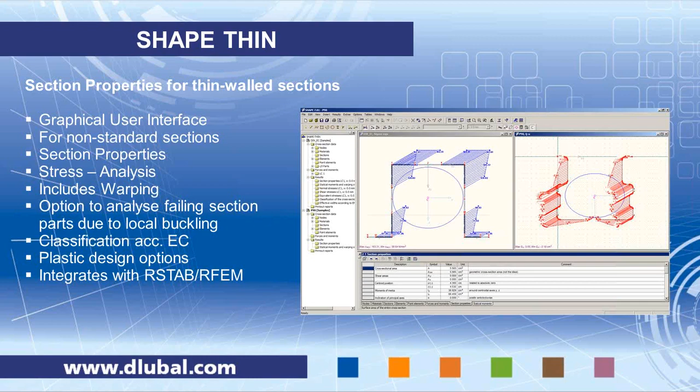SHAPE-THIN also allows you to enter internal forces and get stress analysis. It includes warping, and it's also capable of checking for local buckling and analyzing the failing section parts on a cross-section. It comes with classification according to Eurocode for general cross-sections, and it has plastic design options. It's also capable of importing internal forces from RSTAB or RFEM, or you can manually enter internal forces as you like. We will see this module live, presented by Chelsea in a few minutes.

The second module we are going to take a look at is RF-FE-LTB. It is meant to do buckling and lateral torsional buckling analysis according to second order theory. It's made from a 7-degree-of-freedom 1D finite element, which includes warping moments. In general, you find in the codes procedures for checking stability for standard sections, like an I-section, but once it comes to a general section, there are not many regulations you can use. In general, you have to use a program like RF-FE-LTB, where you can also set loads eccentric, including the 7th degree of freedom, the warping degree of freedom, and with an imperfection and a second order theory analysis and a stress analysis at the end, you can check for the allowable or limiting stress, and whether the critical load factor is smaller or larger than 1.

As I said, it works for all kinds of sections. It allows you to place loads eccentrically. It also has the option to stabilize sections eccentrically, so you can arrange a support or a spring along the top flange, for example. And it does stability and stress analysis. We will also take a look at this module live.

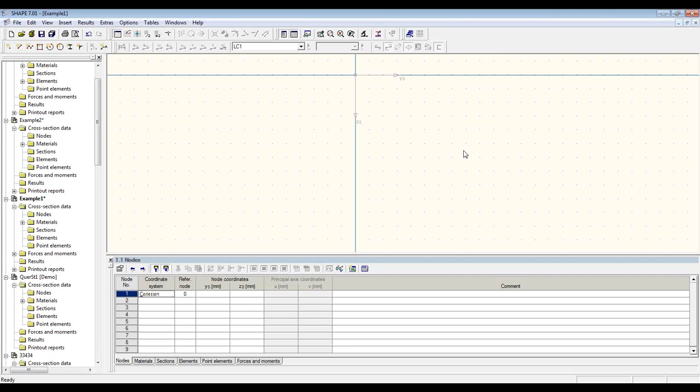Hello everyone, thank you once again for joining us today for this webinar. My contribution for today will be an introduction into SHAPE-THIN by going through a couple of examples of modeling and analyzing non-standard sections. If you can see my screen now, I'm in SHAPE-THIN, and the layout of the program is similar to RFEM in that you have a graphical window and workspace. Below that are tables. To the left here we have a navigator, and at the top there is a toolbar with several tools for modeling and also for displaying results. So in SHAPE-THIN, when you are creating a new file, you have some options in this dialog box. First, you define the name of the section, which is also the file name, and you can also add a description, which will appear in the heading of the printout report.

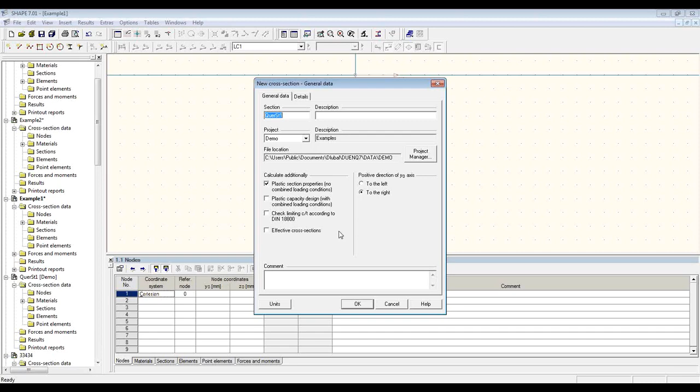Below here, you can see some options for calculation. Here you can define if you would like plastic section properties to be determined. You can also perform plastic design. You can check limiting ratios according to DIN, and also check or analyze the effective cross-sections. To the right here is just an option where you can define the direction of the global coordinate axis.

Okay, one last thing before I start with my example, I'd like to take a quick look at the project manager. This comes with SHAPE-THIN and is a nice way for you to be able to quickly access and organize all of your files in previous sections that you've created. Here is a preview of my first example I will be creating, and here's a preview of the second one, so you can keep that in mind.

Okay, so getting started here, my first example will be demonstrating one of the ways in which you can create sections in this program, and I'll be making a built-up column section out of standard I sections and then modifying them. I will be creating an opening and modeling some welds. So first I'll go ahead from the toolbar, open up the cross-section library, and here I can choose my I section for my first part of this.

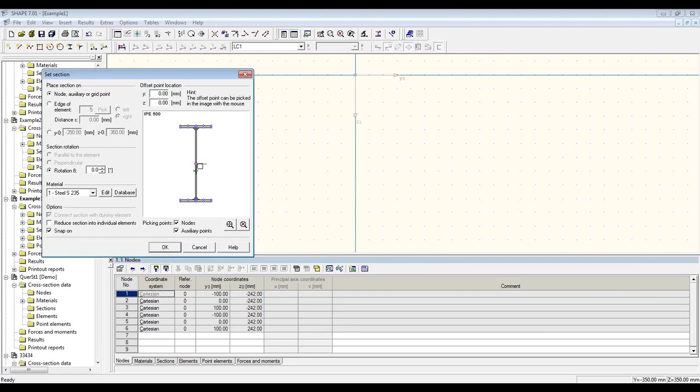So I'm going to take an IPE 500. And this dialog box that appears is what facilitates you placing the section. So since this is my first one, I can just go ahead and place it so that the top flange is at the center ordinate.

Okay, going back into my cross-section library, I can choose an HEA 220. And here I'll use this section, or this dialog box, a little bit more. I want to define a rotation, as if you saw from the preview. I'll have a rotated I section attached to the web. And here is where I define which part of the section I'm deciding my placement by. So at the moment I have the center one selected, so if I go to the window and pick this node here, the center will be placed there.

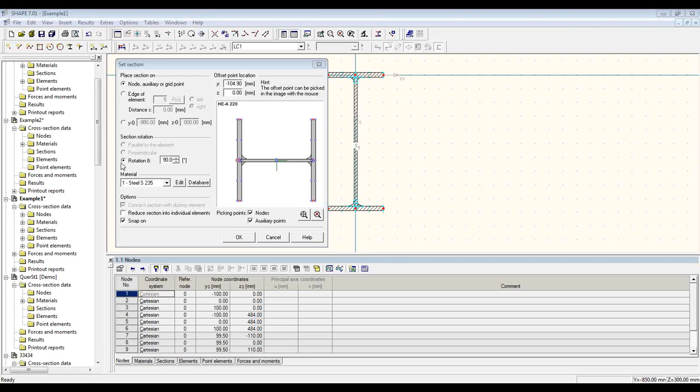So first I want to go in and choose the one on the left side, and then, one moment. Okay. I can go ahead and choose where it's going to be placed on the section that has already been placed. So here I pick the element that I want on the edge on the right side, and there you can see it's locked on the right side of the web here. And I can just place it anywhere, or I can select my distance from here. Okay, and hit OK, and there I have it placed.

So now I have two standard sections that can be selected independently. If I would like to show the section details, I can go ahead and display them from this dialog box if you need to reference that at any point.

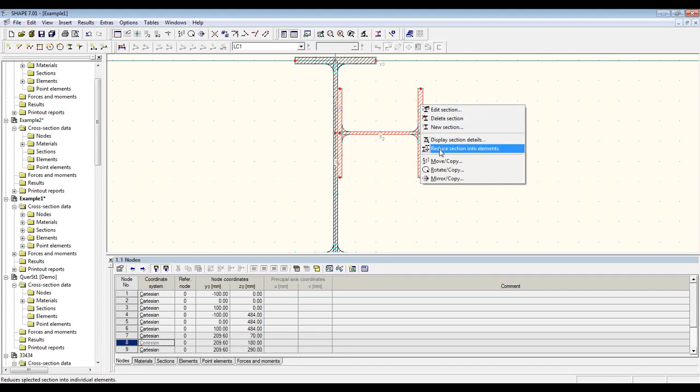Okay, so as I said, I'd like to make some modifications, add an opening. In order to do that, I need to be able to select these parts individually. So if I make the selection of the entire element, right-click, and select Reduce Section into Elements. So now I'll show you exactly, letting me know I have 5 elements and 4 point elements. So here I'll go in, zoom in. You can see that each side of the flanges and the web each make their own element now independently, and the curved parts are point elements as well.

So now I can select the web, right-click, and choose to insert an opening. So here, define my width of the opening. I want 30 millimeters, and its location. I want it to be 60 millimeters from the start of the element, which in this case is the right side. So apply, and I have an opening placed.

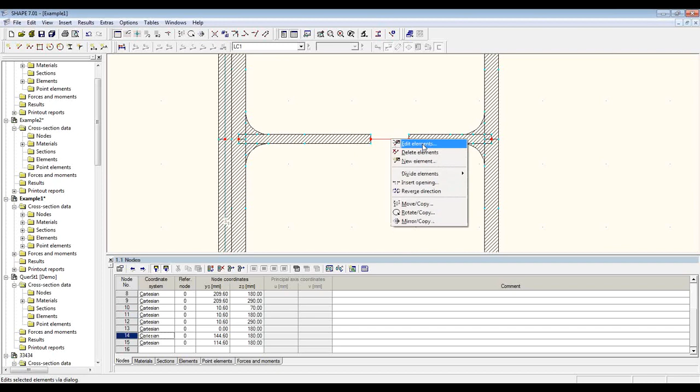When an opening is defined, what is put in between is a rigid dummy element. And for our calculation, we have a value called the effective thickness, which is for the shear transfer. The recommended assumed thickness is the average of the thicknesses of the neighboring elements. So in this case, the web here is 7 millimeters, so I'll make the effective thickness 7 millimeters.

Okay, so next I want to model a couple welds at this connection point at the top and bottom. So for that, I'll go back up to the toolbar and select a new point element. And this is ready to go. I have my radius at 10 millimeters, and then I can just select which node I want to place it at, and there I have my weld.

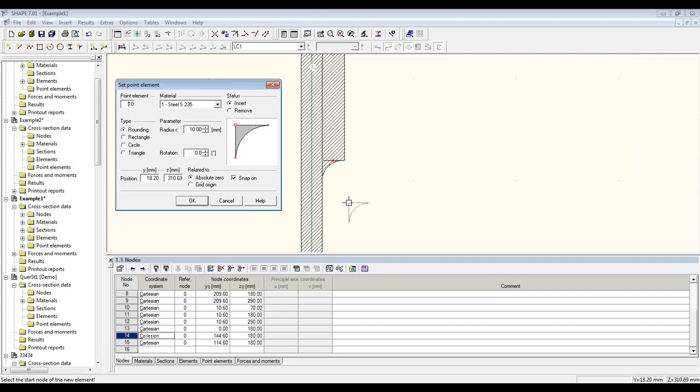If I go up to the top, I can make a rotation, negative 90 degrees, and place the top weld there. Now the area of this weld element will be included in the total cross-sectional area.

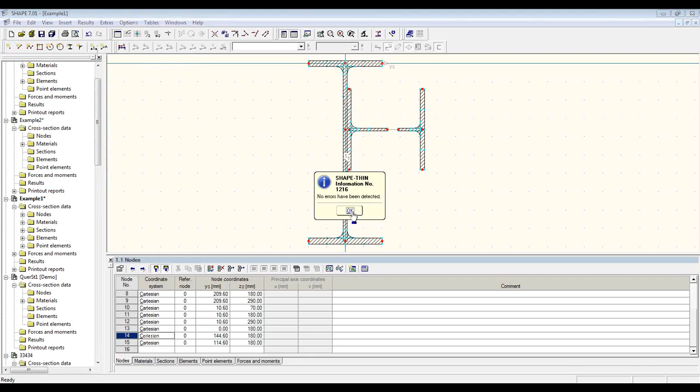At this point I have all of my section modeled. Before I do my calculation, I can do a quick plausibility check. This check will find if there are any errors, and if there are, it will tell you exactly what the problem is so you know what to fix. Plausibility check: no errors were detected. Now we're ready to go ahead and run our calculation and get our results.

The first table you see here is the section properties, with a list of all the significant section properties that have been determined. You have your shear areas, cross-sectional area, position of the centroid, and so on. You can define what is included in this list by using a filter, and you can include even more properties as well.

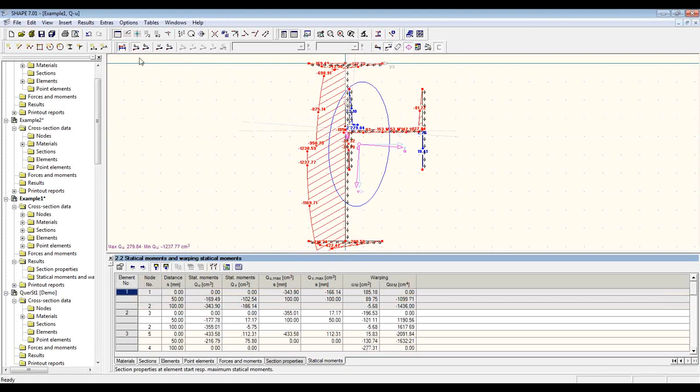The next table available is the statical moments. These are numerical results, and they're also included in your graphical layout. I'll turn this back on so you can see the statical moments in both directions, the normalized warping ordinates, and also the statical warping moment.

One thing I'd also like to point out, before you get to your results, is a table for internal forces and moments, in case you want to perform a stress analysis. These values can be imported directly from RSTAB or RFEM, or they can be entered manually.

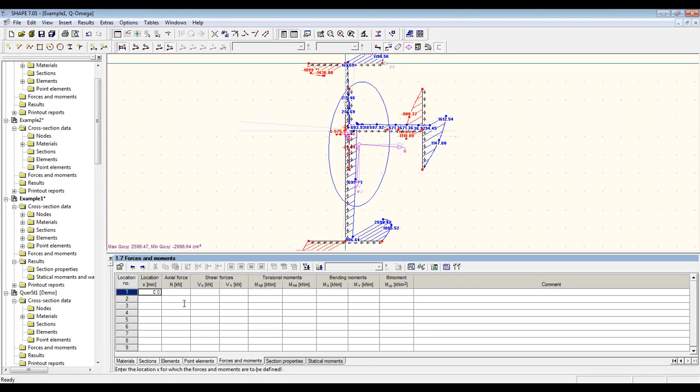I'll go ahead and add a couple of load cases so you can see. At the 0x location, you can do it at multiple x locations. I'll add a compression force of 80 kilonewtons, and bending moments in both directions for the first load case. Then for my second load case, I'll add a smaller axial force and bending, in the opposite direction for my last bending moment.

Now when I run my calculation, a few more tables appear at the bottom, showing the values both in tabular form and graphical distributions. So I have my normal stresses, my shear stresses—there are none here since I didn't have any shear forces—and also your equivalent stresses.

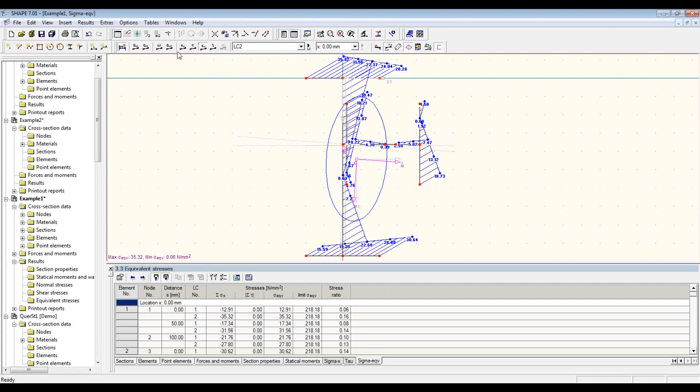Going back to my graphic here, I can include these images of the results in my printout report if I'd like. I'll go ahead and send a picture of the equivalent stresses to the printout report, and set it at 50% of the page. Then I'll also send the normal stresses, also at 50% of the page, and open it with OK.

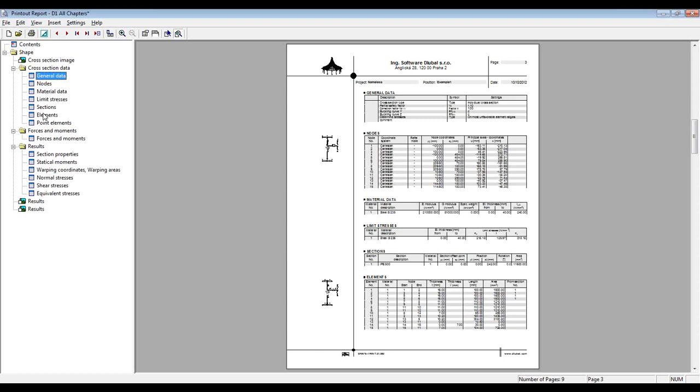Here we have our printout report, with the default setting. It has an image first, then tables of your input data and your results in the same order as they appear in the program. Below, you can see the images that were included. You can customize exactly what information you want to include in this dialog box, and reduce the amount of information that's included.

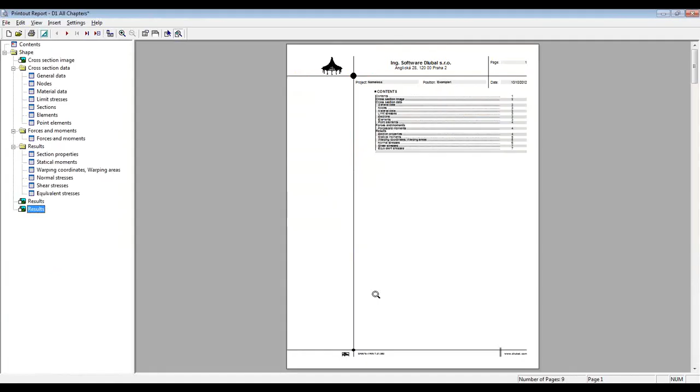Another nice feature of SHAPE-THIN is that for a quick summary of the section, your input data, and your section properties, there's an option to create a so-called short form printout. This is usually one page and sent directly to the printer, but just to let you see what it is, I'll append it to my document. This is the page here—a one-page sheet with an image of whatever you have displayed when you send the print, and a table with your input data and the section properties that have been calculated. That's nice to have.

That's all for my first example. I'll go ahead and get started on my second example. If you remember from the quick preview I showed at the beginning, it's a symmetric section that will be used in a rain gutter system.

For this one, I will just draw it in manually using the element tools in the toolbar. To get started, you define your grid, or your reference point in the grid. I'm working with a 2 centimeter grid spacing. Also define your thickness and material, and then you can just draw it into the grid.

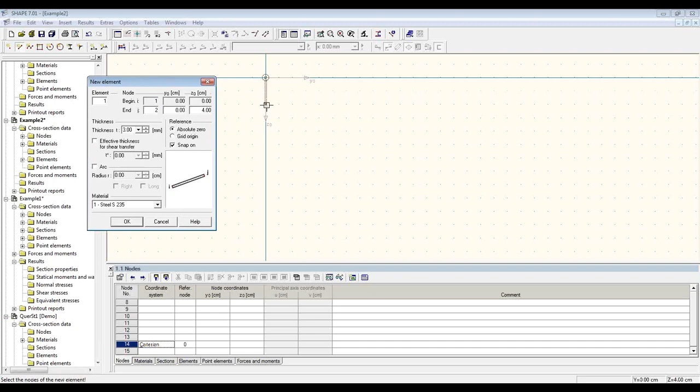My second line I want to be 5 centimeters, but because it's in between my grid spacing, it's easier for me just to type in 5 centimeters as the end node. I want to continue on from this node, but again it's between the grid spacing, so what helps is if I adjust my grid origin to be at this node. Now I can continue on directly from here.

I want the height to be 16 centimeters, and then the width of the trough I want to be 30. Because I have my reference, you can see in the dialog box my reference is at absolute 0. If I change it to the grid origin, so now this is the 0 line for Y, I can go ahead and place it at 30.

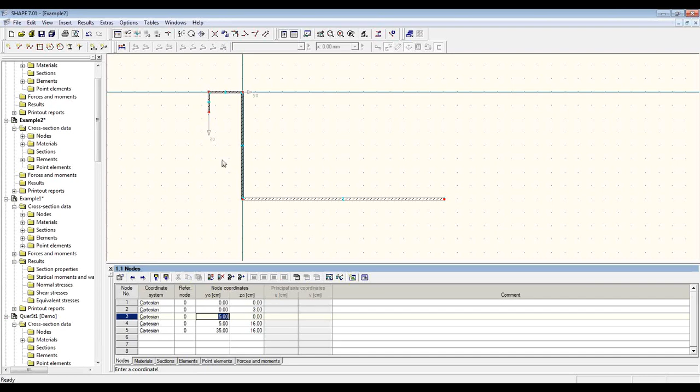Since it's symmetric, I can just do manually half and then make a copy of the rest over. First, I'd like to shorten this line from 4 centimeters to 3. A quick way to do that is to go into the table, find that line, and adjust the coordinate that way. Now it's shortened, and I'm ready to select and make a copy.

Going to the toolbar, I have the mirror option. Create a copy through the Z axis, and select the center of this trough line that I have here. Just like that, I have my full section.

I can go ahead and run the calculation. First, I'll just do a plausibility check to make sure I have all of my elements connecting. Everything is okay, and I can get my results.

Again, you see right away the table with the section properties, and your statical moments and warping constants there.

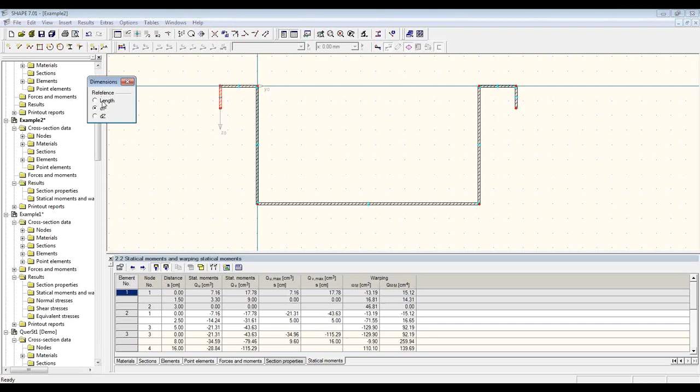Another thing that is nice to include in your documentation is dimensions, an image of the dimensioned section, and I'll show you how you can do that quickly. I can turn off the view of my results and use the dimensioning tool here. Very quickly I can just select to show the heights of these lines and also do the horizontal lines. This is also a nice way to quickly make sure you've made all your lines the right length.

Here you can see, if you check the table, I believe I made... everything is okay, so I think I just made a bad selection with my— I can't select this, but here we go. I just made a bad selection for the dimensions, so let me just try that again.

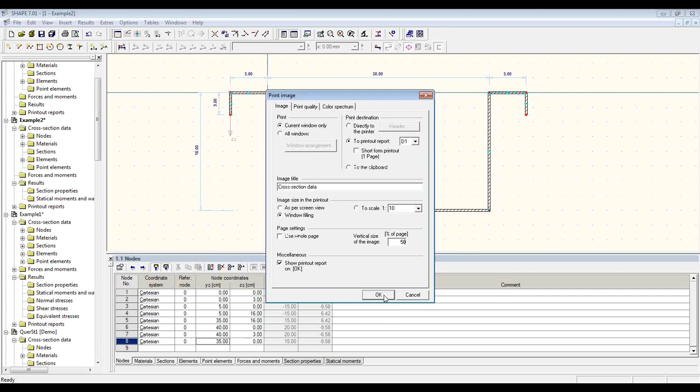Yes, everything is okay. As I said, this can be included in your documentation, so I can just send this once again to the report. 50% is a good size for this type of image. And then there I have a dimensioned drawing of my section to include in the documentation.

So this is all that I had to show you regarding a couple different ways in which you can model in SHAPE-THIN. It's also possible to import a DXF file to use as a template, so this is what Walter will cover, so I will save that for him. Walter will also take you through a few more hints with working in SHAPE-THIN and continue with the section on into RFEM and also present the module FE-LTB. So thank you very much for your attention, and I'll go ahead and let Walter continue from here.

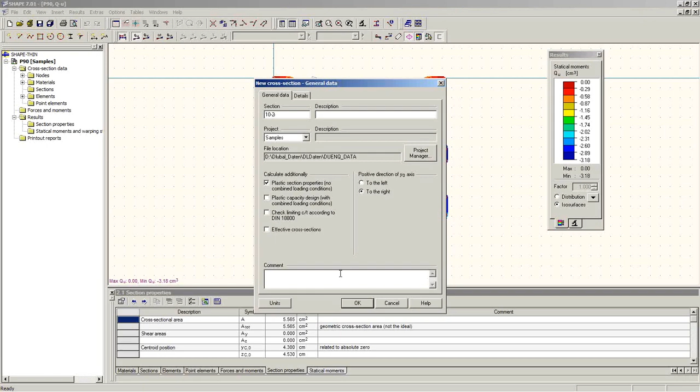What I'm going to do next is import a DXF template into a new SHAPE-THIN model. Therefore, I open a new cross-section, I name it with a number in this case, and I stick with the default template. I have here an empty file. As you can see, you can open several files at the same time. I use now the bottom tree here, and material is already selected as steel S235.

If I want to import a template, I use the File menu, Load DXF Template. The DXF template can be from any DXF file. You find those files typically from the makers of such sections on the internet. You can download CAD templates, and I used one of those from a cold-formed purlin maker and saved it as a DXF file.

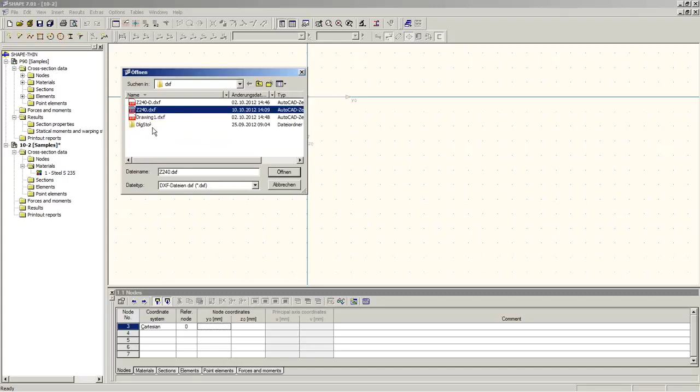Once I import it, I get a small preview dialog. I can first of all show and hide the different layers.

In those DXF files, typically there are all kinds of lines, texts and explanations, and you have the option to select a certain layer where the information you like is located. I can also automatically assign to this layer or those elements a thickness that I enter in the text box, for example 3 millimeters.

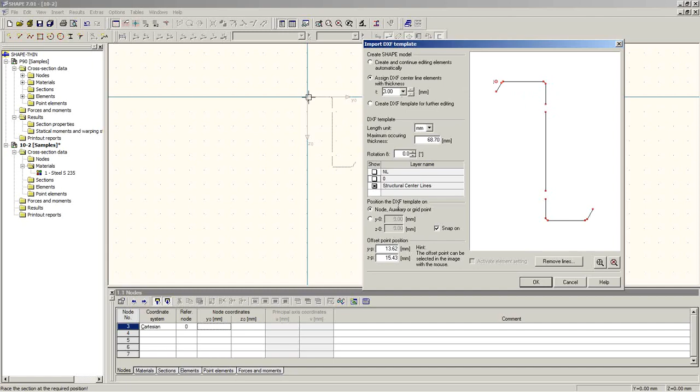After that, I can grab the template at the center point origin and just drag and drop it into the main SHAPE-THIN window. At a mouse click, I have here my complete structure already generated.

What I see here also is so-called arc elements. If I double click on it, I see the radius of those elements, the thickness, and so on. It's just like a straight element, as Chelsea showed us, but there are also arc elements possible.

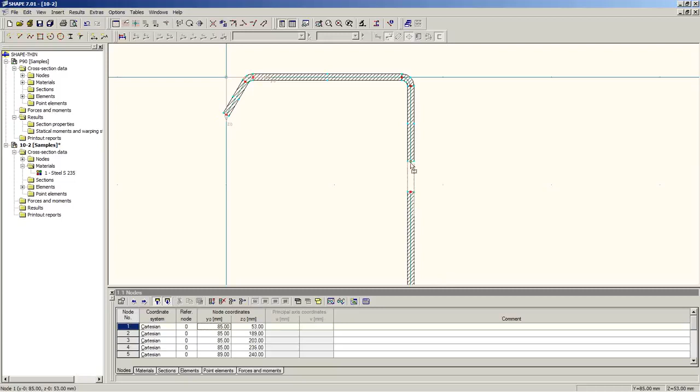In this model I had, there was an opening for bolts. Because I'm going to use this cross-section to model a 1D beam in three dimensions, I don't want to have this opening along my beam, so I close it here, since bolt holes are typically only a local problem. I can just click and drag the nodes to the next connecting node and it will automatically connect.

My cross-section is then ready for analysis. I run the analysis and get the tabular information of the results, as Chelsea showed. Interesting for me are the section properties, and I can display them, for example, on the side of the window, and go through the graphical results by showing the different results here.

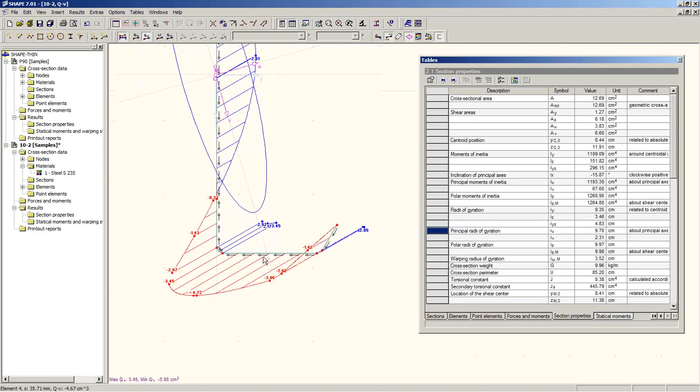I notice there's a little problem where I can close the tables—I don't like to see them here—where the flow of the diagram is not continuous. The sign of the result may depend on the orientation of the individual elements.

If that's the case, I can click on the element, right click, and use the command reverse direction. I do the same thing here, because we had the same problem. Reverse direction. If I analyze the structure again, now I see there's a continuous flow of the results, and it forms a nice picture.

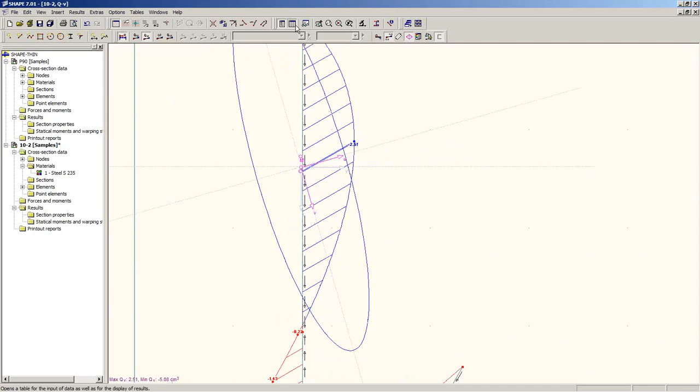With this I also get, for example, the inclination of the principal axes. If I want to know how big that angle is, I can show the table, and there should be the inclination of principal axis: minus 15.87 degrees. I save the result in the file 10-2.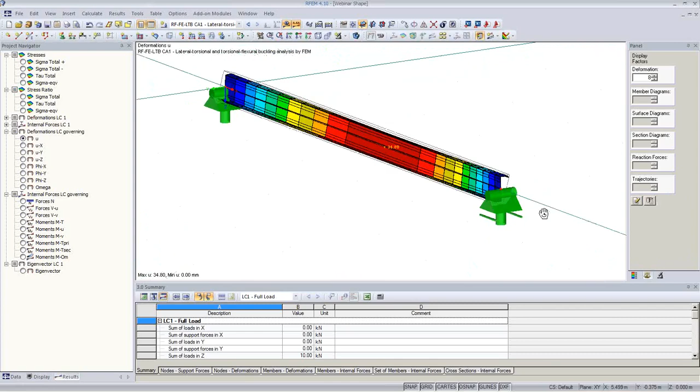And I go to RFEM. In RFEM I will also create a new structure. What you see here is the final result of what I'm going to do now: a 5-meter long beam with a linear load on top, and we will do an analysis of the critical load and show some tools inside RF-FE-LTB.

We start now a new structure inside RFEM, and I can call it sample 2, maybe. It's a 3D structure, and I can model it just as a regular structure that you might have seen in the previous webinars.

I create a new member of type beam, and I create a new cross-section, choosing it from the library. In the library—if I go back one time and choose the library here—I see there are two buttons: cross-section programs SHAPE-THIN, and another one, SHAPE-MASSIVE, which is for thick-walled cross-sections.

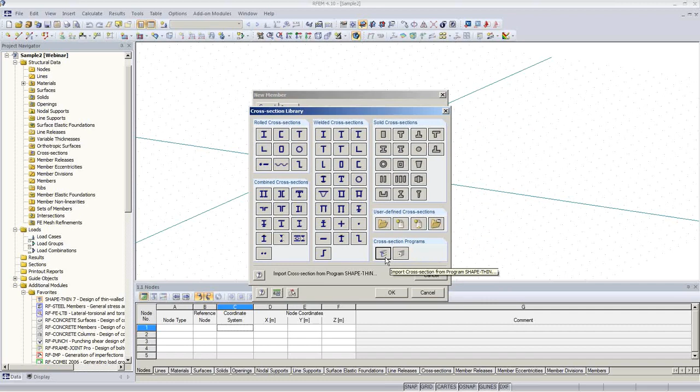I use SHAPE-THIN here, and then I have the option to select my cross-section that I just made, 10-2. I can check the sectional properties, and all the parts are here—it's like a regular integrated RFEM section. I also see the angle is there, so most likely I picked the right one. The material is steel.

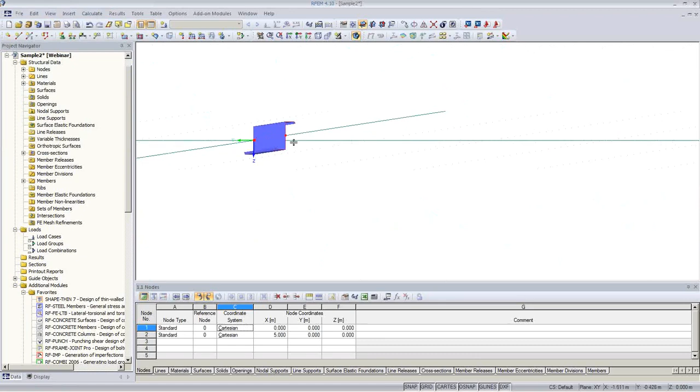A couple more OKs, and then I can enter and select the grid lines and enter the member. It's now 5 meters. Nice feature: you see the rendering is just like a standard library section, and it gives a very good visual impression.

If I don't want to see it, because it's hiding too many other parts of the structure, I can turn the rendered mode on and off.

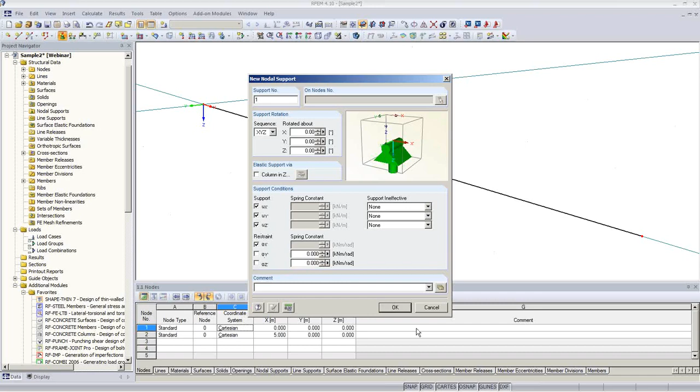I need some supports. I create a new nodal support and choose a support fixed in all 3 directions, with a restraint about the local longitudinal axis phi x. I click OK and enter the first node support. Then I create another one and make it a fork-type support again, but this time I release the fixation in the UX direction, while keeping the restraint about phi x.

So this will give me a correct support condition where I can analyze the structure.

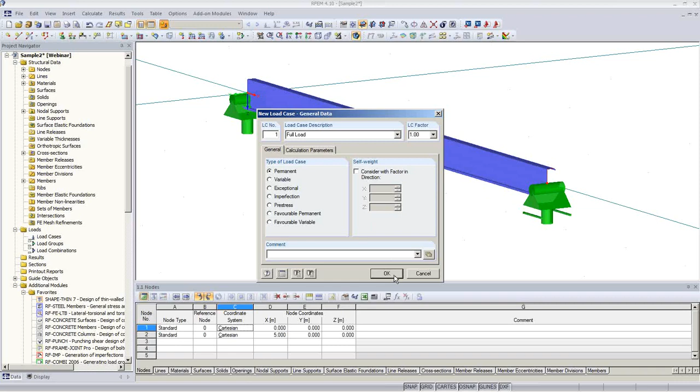Next, I will create a load case. I call it full load. I disable self-weight because I will add the self-weight as an external load. And I create a linear load, a new member load, global, related to the member, and for now I choose 2 kilonewton per meter.

With this I have a simple analytical system and I can run the analysis and I get my results. I get deformation because we have a non-symmetric cross-section. Deformation is not straight into direction Z.

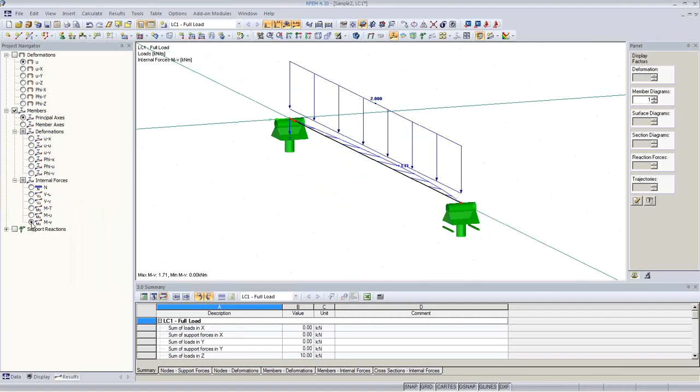We also have bending moments in 2 directions. So if I show this, we have MU and MV. Maybe I have to point out that we have now the option in RFEM to use either the principal axis or the member axis for results. When we imported the SHAPE-THIN cross-section, it was automatically rotated so that the flanges were parallel to the main coordinate system. The main coordinate system is the global XY system, and the local XY system are in line by default. So I have to rotate it by the principal axis.

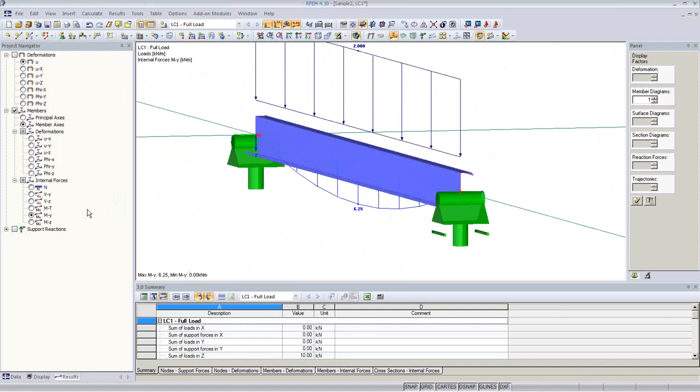But if I want to see the internal forces, I can switch them into both coordinate systems using these options here.

Next, I'm going to do a regular stress analysis with the steel member module for this beam, and I just want to run this load case, and I have a utilization ratio of about 60%.

There is basically plane loading for this member. Also the governing internal forces are only, well, for the global axis it would be only MY and not MZ, but for the local, for the principal axis, of course, it has 2 bending moments.

Okay, we have a utilization ratio of about 60%.

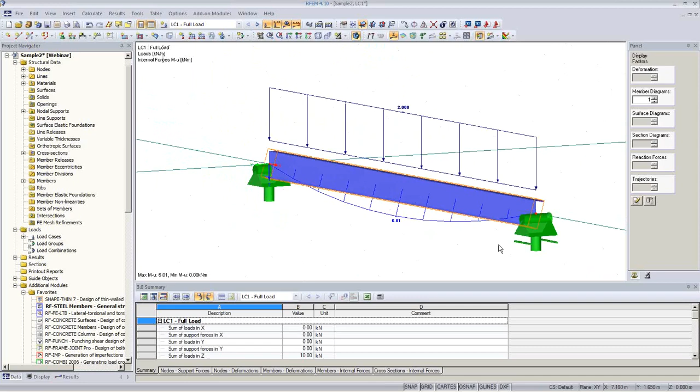Let's just remember this. Next, I'm going to RF-FE-LTB. Typically, if I have a larger structure with many beams, many columns, many members, and I only want to do a design for a part of the structure, let's say for one continuous beam, or maybe a frame, or maybe a column.

But it's not possible to do a three-dimensional analysis with a three-dimensional structure in RF-FE-LTB. So we have the issue that we have to isolate part of the structure from a global RFEM model into RF-FE-LTB. The way we do this is I create a so-called set of members, and with a set of members I can group one or several members into one set of member and give it a name.

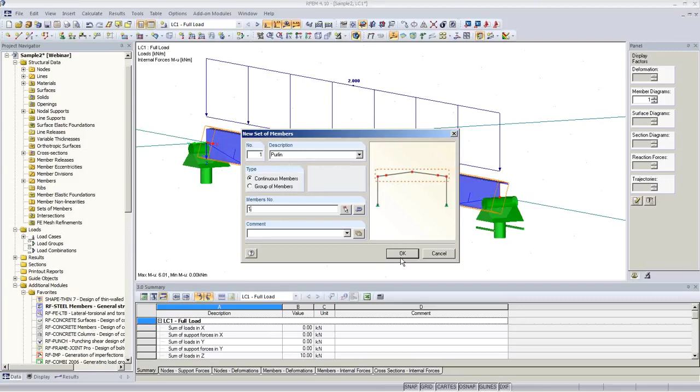So basically I can combine, typically in a situation of linearly connected members, several linear connected members into one set of member. Here I have only one member, so it's not so breathtaking, but I need this in order to work with RF-FE-LTB.

In RF-FE-LTB, I'm going to open it now. I can select those sets of members. Since I have only one, I can select all. It also automatically takes over the loads, so there's one load case, full load. It takes over the materials, the cross sections. I have all the information also here in this module.

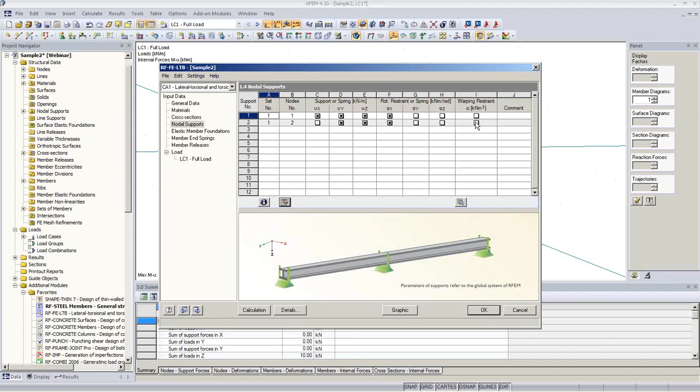And the nodal supports, as long as they are defined in the RFEM model. Now I can adjust them and add them or complete them, because in RFEM or in RF-FE-LTB we also have the degree of freedom of warping, so there is also a warping restraint that I can address. The same thing applies to the elastic member foundation.

Here I have the option to add elastic restraints, and the special thing is I can give it an eccentricity. That means I can have a restraint on the top flange, on the bottom flange, or at one location along the beam. In RFEM itself, I can only have a restraint on a node, or if it's a linear support, on a line, but I cannot place it eccentrically.

Same thing with member end springs. On each member end, I can attach eccentric springs. For example, if I have only a discrete support somewhere along a continuous beam, I could do this.

I also can have releases in such structures, and again I have the warping degree of freedom here. The loads are also imported from RFEM.

There are different load types we can use, different load distributions, and if you click here you have the option to pick from the offers here, load direction, and we have the 2 kilonewton per meter imported. Again, we have the option to have an eccentricity, and this is very important if you deal with stability problems.

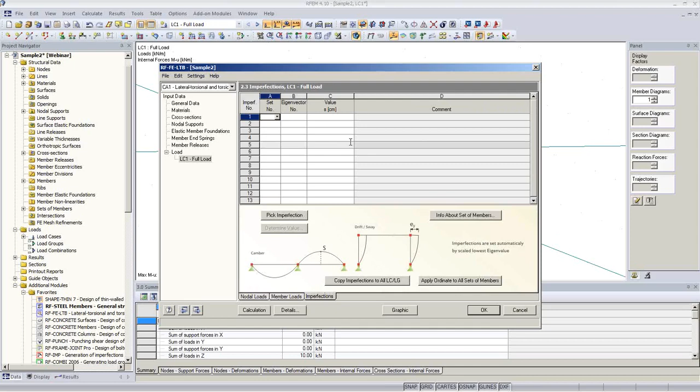I'd like to use the default settings and run the analysis. What we get here is, again just as in steel, a stress analysis. We have here axial stress, shear stress, and equivalent stress. And now we have also utilization ratio, and you see the difference in the calculation. We have here almost a utilization ratio of 1.

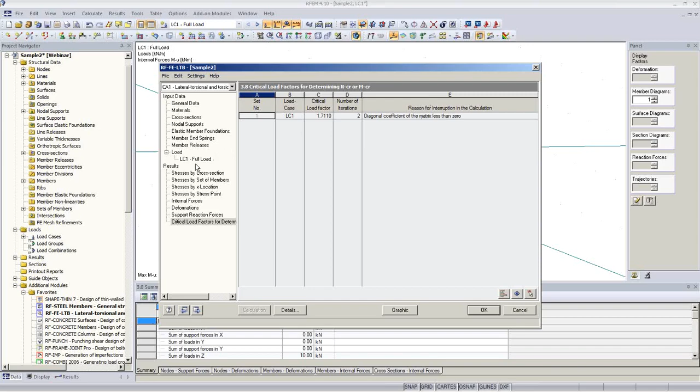And also as a result, we get here the critical load factor. We get 1.71 as the critical load factor. And if we want to have a stability check according to theory second order, we need to have an imperfection, and we need to have a stress check with a utilization ratio smaller than 1, and we need to have a critical load factor that is bigger than 1. And then with this we can check for stability. Okay, so without any changes from RFEM, I get those results.

We can take a look at the graphical results. For example, here we have the deformation, and we can show this a little bit better. If we go to the display tree and check here deformations, we can have here cross-section colored, and you get this nice display where we can also increase the deformation a little bit, and we see what happens to these cross sections.

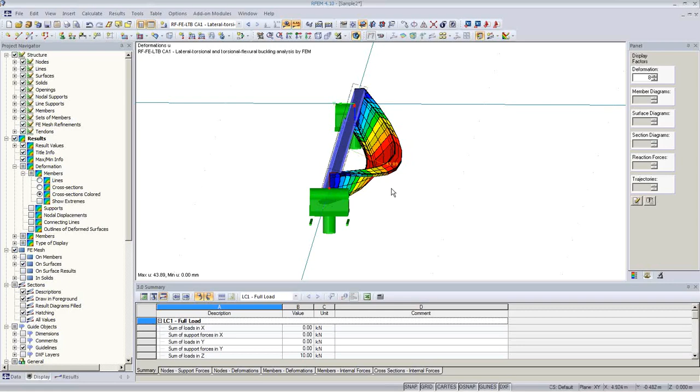So it's because of the unsymmetry, it's a combination of horizontal and vertical deformation. You can see the top flange is moving sideways and causing all the other internal forces, of course. So we can also take a look at the results.

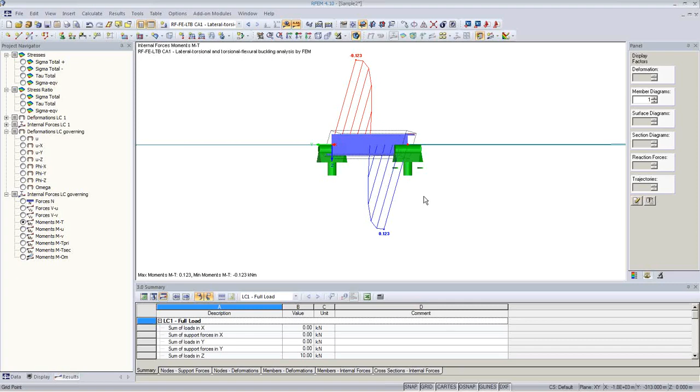So we have some small axial forces, we have the shear forces in both directions, we have also torsion that we don't have in RFEM, because in RFEM the crosswise loads are always in the shear center. So if we have only global loading, global load direction, there will be no torsion. But in this module, our RF-FE-LTB, all those effects are implemented. Okay, we have primary and secondary torsion, which comes, and also we have a warping moment.

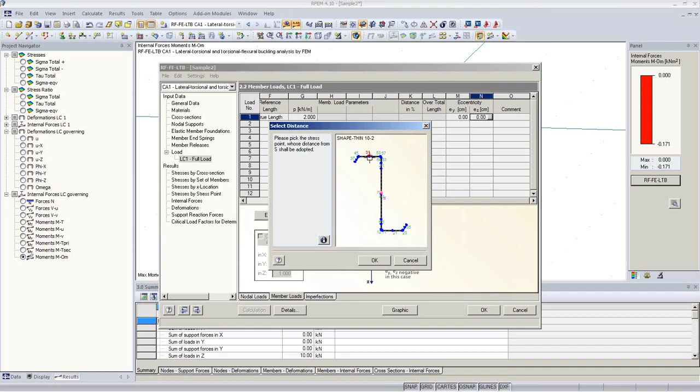Now we want to go back to our RF-FE-LTB and continue with our stability check. I'm going next, put the load eccentrically. So I put it on top because most typically the load is imposed on the top of the cross section via maybe a steel deck and so on. So if I pick the eccentricity, I know now where exactly my load application will take place.

If I run the analysis again, the eccentricity has a very negative effect. You see the stresses increase because the internal forces change, and also the critical load factor drops a little bit. Okay, what can I do now? We saw that the deformation was a combined deformation from rotation and horizontal movement. If I'm able to restrain this horizontal movement or this rotation, I will have a very good effect, I think.

So this I'm trying to do now. I'm going to the member elastic member foundation. I select my first set of members, and now I can enter all the spring constants for those restraints and also the eccentricity, but typically I don't know those springs. So we implemented a tool that gives you the ability to calculate such springs.

In this tool, you can select what type of restraint you have, whether it is a lateral or rotational restraint. Lateral restraints typically would be trapezoidal sheet. Of course, if you apply such restraints, you also have to make sure that the, for example, steel deck is able to handle those stabilization loads from the restraint.

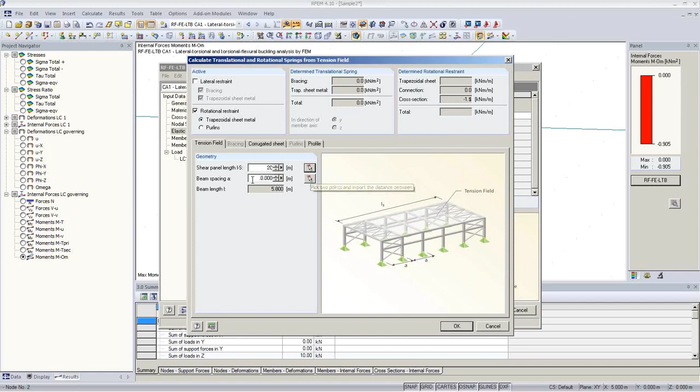I'd like to apply a rotational restraint this time from a trapezoidal sheet. I need to give the program the information about what's the span of the support of the trapezoidal sheet and what's the length of the shear panel. I can either pick it. If I have a building, I can pick 2 nodes. In this case, I don't have, so I just assume here maybe it's 20 meters. The beam spacing should be 1.5 meters.

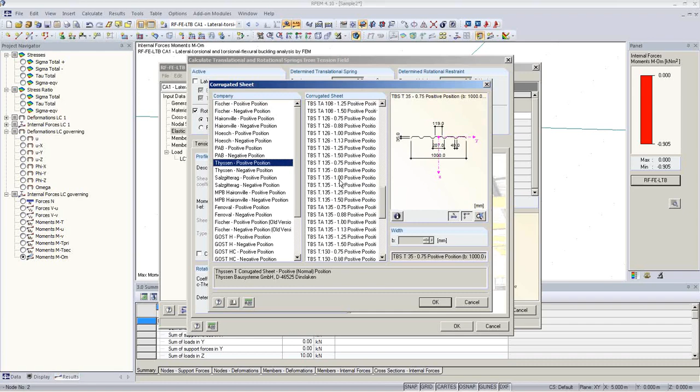The steel deck should be from a corrugated sheet, and I pick there - comes a nice library from some provider, some steel deck, maybe something like this. Okay, all the parameters, effective stiffness of the steel deck are imported.

If it is a continuous beam type of mounting of the corrugated sheet, I can also take this into account. Also, the rotational restraint from a connection can be taken into account, and there's a table that you can use from DIN that gives you some parameters depending on how many bolts you use to fix this steel deck.

So I say the bolt spacing should be the bolts should be in every rib of the corrugated sheet.

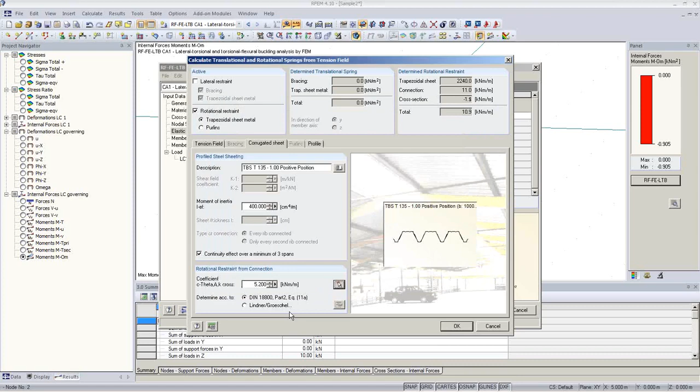Okay, and then the last part is the rotational stiffness of the cross section itself. There are also formulas that can be used, but they are only valid for I and channel sections, and this time I just ignore them.

With this information, we analyze the spring constant for a rotational spring, and it's already written in here in this input box. On OK, it will be transferred to the table here.

And next, I'm going to select the eccentricity and say okay, this rotational restraint should act on top of the cross-section as well.

Okay, if I do this and run the analysis again, you see we dropped quite a bit in the stress ratio. We're about the same value of 60% that we had from the regular steel module. And also, if you take a look at the critical load factors, we see it's also dropped to 6.32.

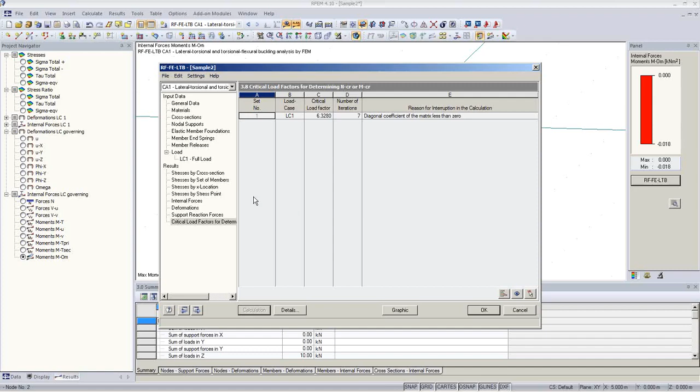To make the analysis of second order, stability analysis according to second order complete, we need to apply an imperfection. This is the last thing I'm going to do. There's an imperfection tab that I can select. And in this case, you might be able to find or to know what the shape will be for an imperfection, whether it's cambering or sway or inclination.

But if it's a 3D frame structure, you might not know how the imperfection really looks. It has to be according to the first buckling shape. In most codes it's regulated this way.

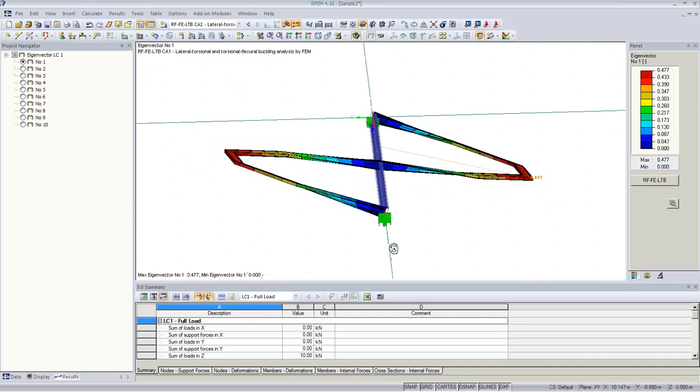RF-FE-LTB has the option to analyze several eigenvectors, and I can pick the imperfection graphically. That means I can analyze several eigenvectors, and I can take a look at them graphically.

If it's too much of a distortion, I can change them. I can change the magnification factor, and you can see here the typical failing modes of such a beam, and I will choose in this case eigenvector number 2, which is the cambering that I want to have.

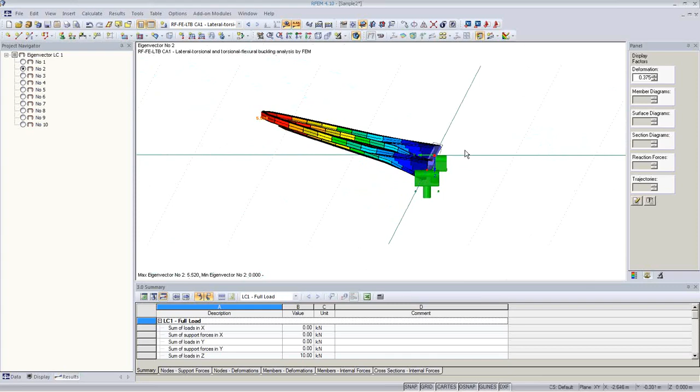And this, the horizontal part of this imperfection shape will be applied then to the structure. So I have this graphical view, which is very important to see what type of imperfection I'm selecting.

I go back to RF-FE-LTB, and now I need the scaling value for this imperfection. I need to have the peak value basically of the imperfection. Typically it is length divided by 200, so in this case it would be 2.5 centimeters. There might be different values you find in different codes, but Eurocode, for example, gives you hints in there.

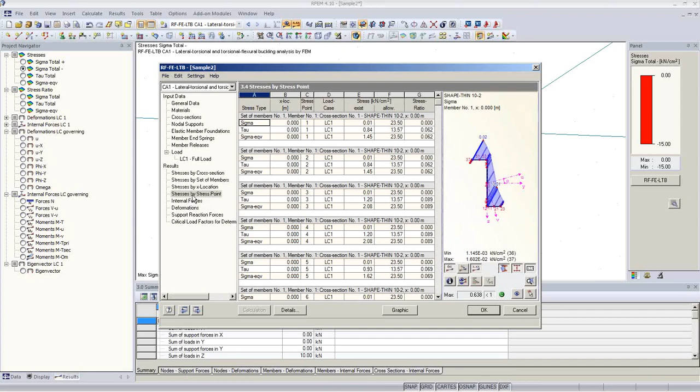With this imperfection, I run the analysis again, and I have again slightly higher stresses, and my critical load factor may be increased a little bit from 6.22 to 6.28. But after all, my stress check is okay, critical load factor is greater than 1, and all my results are fine. You see here there's different tables, stresses by cross-section, set of member x location, internal forces.

So you can check all your structures, you get the deformations in numerical way, you get your rotation values here. You also have the support reactions. Also, for example, a good information is the twisting moment at the end from the imperfection, for example, that might be necessary to be taken over by the supporting structure for this purlin.

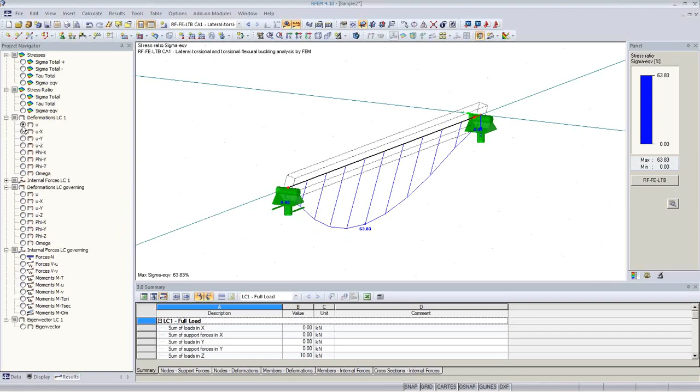We can take a look at it also graphically. We have in our RF-FE-LTB a different navigator for results, sigma total, sigma positive negative value, or the sigma equivalent value, and we can use the stress ratio, so 63%. We can also show the deformations, and I can now show this again, and you can see this horizontal restraint due to our rotational spring is doing a good job, and it's helping to stabilize this structure.

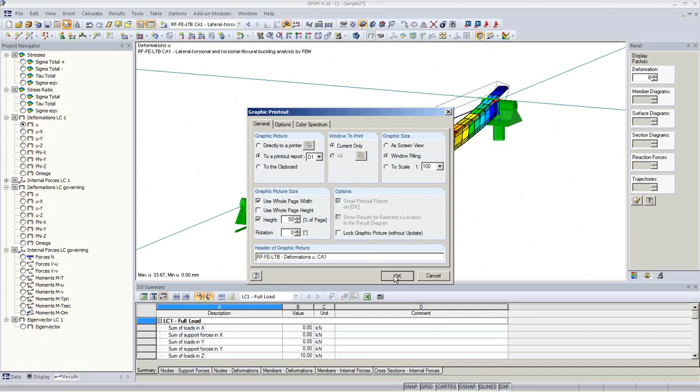Before we go over to some questions, I'd like to do some documentation of our RF-FE-LTB. I print this structure, this figure here, to the protocol print. I want to do it window filling. I want to have it on 50% of a page. And when I do it first, I have to open the printout report one time, and it gives me a chance to show you what is in there. So here we have this graphic.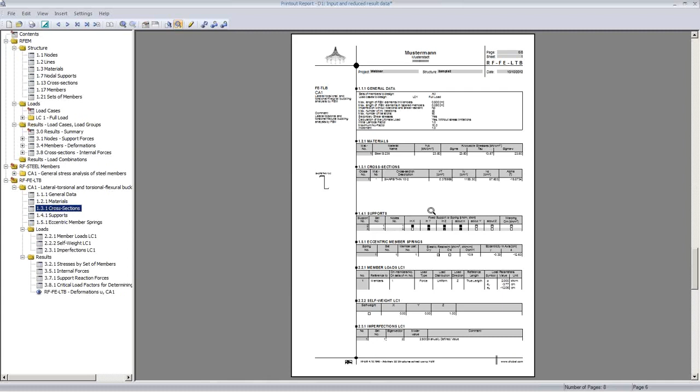RFEM has the regular tables here. You can flip through and zoom in. You have the option to select what you want to have in your printout report. There is an extra chapter for RF-FE-LTB that gives you all the results we just saw manually in the module itself, including the eccentricities, all the stresses, and all the internal forces as tables.

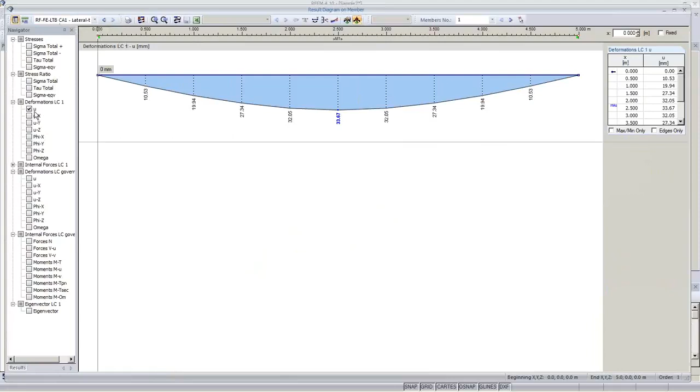There is one more nice thing I'd like to show you. You can right-click on the structure and get a result diagram. If you are in the RF-FE-LTB results, you can check the equivalent stress, the global deformation, the internal forces N, shear forces, torsional moments, local, primary, secondary, bending moments, and so on, everything nicely arranged in one line under each other. You can scroll here, and print this to the printout report. This is a nice document of all those internal forces, and you can check everything graphically. Anytime something changes, the printout report will be automatically updated, so it's always current.

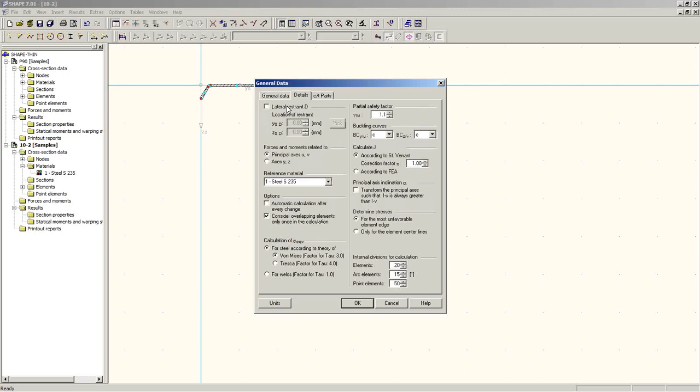One question is, what about the b/t relation of this thin structure? How can we check this? It's a question for SHAPE-THIN. I go back to SHAPE-THIN. You have the option to change or take a look at the width thickness ratios only if you use a certain setting. I go to general data, and then you can check 'limiting C to T values according to DIN.' If you go to the C to T parts, you can also check the rule: elastic-elastic, elastic-plastic, plastic-plastic. If I do this, or just leave it here, and analyze it, I run the analysis again and take a look at my tables.

Of course, for this I need internal forces. So I check some internal forces, maybe a bending moment, and maybe an axial load. If I run the analysis again, I get a c/t value check. You see here, for each element, the restraint type, whether it's supported at both sides, the stresses, and the allowable and limiting c/t value, and the utilization ratio, basically.

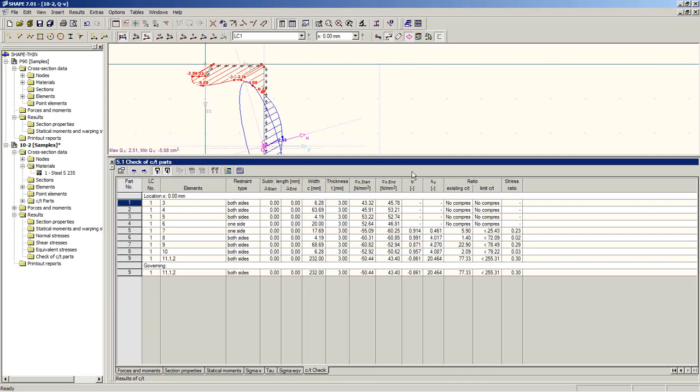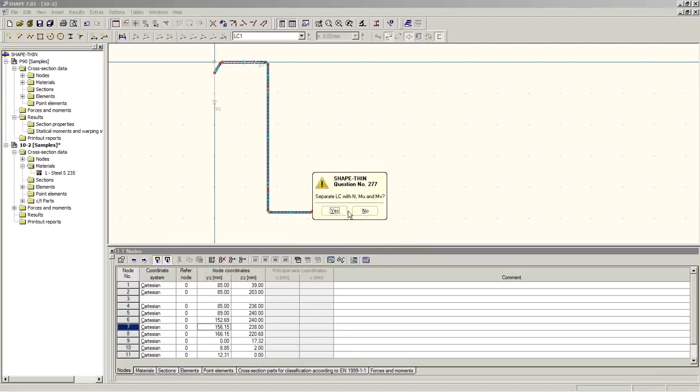This is according to DIN, and it's also possible according to Eurocode, but it's a different setting: plastic effective cross sections. Here we go. If I check the effective cross sections, then I can use, for example, Eurocode as well. I have here also the cross-section classification according to Eurocode. It leaves out the curved elements because classification for that type of curved element is not part of Eurocode, so we don't know how to do it - it's a limitation.

But what you see here, the blue lines are the local buckling parts, and the support condition and so on is all here again. And then at the end you get a classification that we can take a look at.

Material - oh okay, the problem here is I didn't choose a Eurocode material, but if we had done this, I would have gotten a classification for Eurocode as well. It is possible to do this classification in Eurocode. I will send you this picture with the classification, or maybe I can use another file.

Hang on. There is one typical case here. It's a hat section, and here it is according to Eurocode, using the effective cross-sections method, which you can set here.

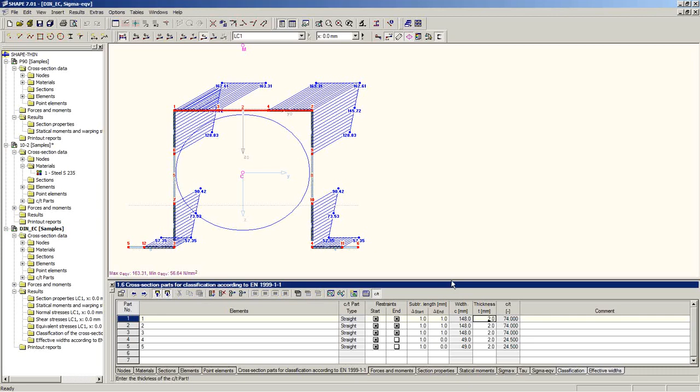In this case, we can take a look at the c/t values for each element, and we have classification here. In this classification, we get results for all the parts for each element. If I click here, for example, it jumps right away to the right table. You get the c/t ratio and all the internal parts and the final class. So if it's class 4, the class of the cross-section will also be class 4. And if I work with effective width, I get a stress analysis only with the effective width in this type of analysis. So I hope this question was answered.

Is it possible to make a database of sections? For example, a supplier has 20 types of profiles. Yes, you can do this.

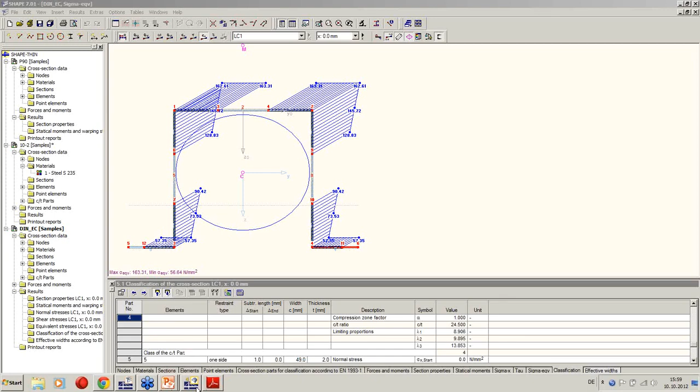You create them inside SHAPE-THIN and take them over to RFEM. In RFEM, if you type them into the cross-section table, for example the input cross-section table, you will be able to read this cross-section. You have to know how it's named, but it will automatically recognize it.

When I import the cross-section from SHAPE-THIN, it automatically becomes part of the user-defined cross-section library in RFEM, and each cross-section is also stored inside the RFEM file. So if you send an RFEM file with a SHAPE-THIN cross-section, it will also be there for the user on the other RFEM license.

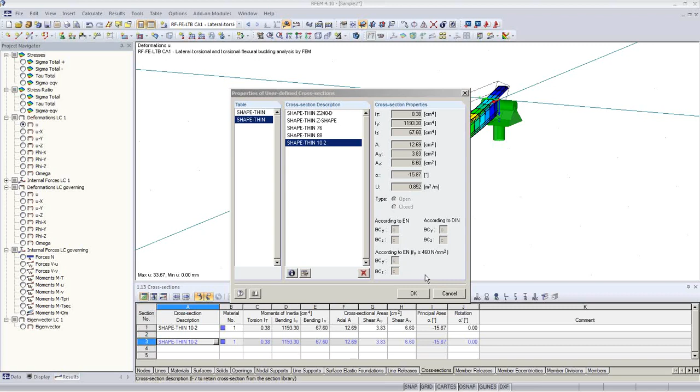Okay, this was this question. Next, printing to an RTF file. Typically, you can export each protocol to RTF.

So I can go File, Export to RTF file, or VC Master - there's another program that uses RTF files. You can export it to an RTF file, and then you have basically a Word format, which is unformatted, and you can use it for any other purpose, changing it and adding your own headers and graphs as you like.

And of course, you can also copy and paste into this file. Let me try it, I haven't tried it for a long time. File, Export to RTF, position RTF - maybe I'll put it to the desktop so I can find it quickly.

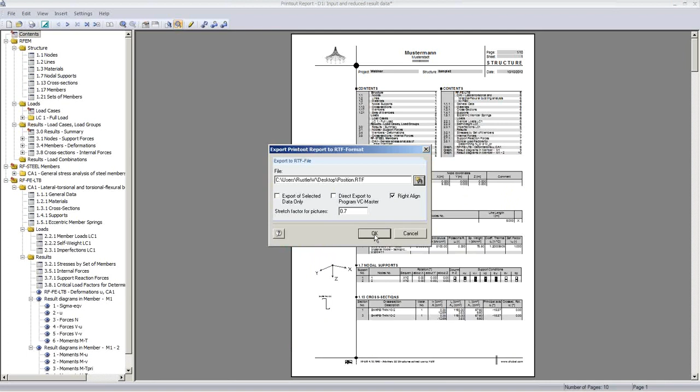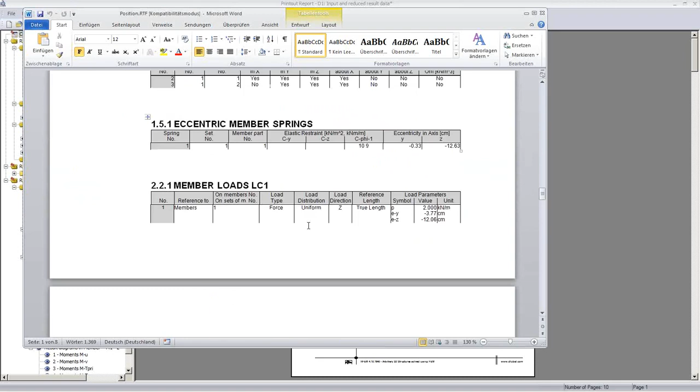Okay, now there's a file, position RTF. I can open it in Word, and I have the tables all nicely arranged in my Word document. Then you can enter your own header and your own things, and there should also be some graphics which you can use.

If you want to copy and paste those graphics, you can say Control-C, and you can also say Control-V, and you will have the graphic here, what you have on your screen, depending on the size of your workspace and so on. So it's all working like in any other Windows application.

Okay, let's see what else of questions we have.

There's another question whether we can have the effective width according to a German code called DAST 016. At this moment, it is not possible. There will be, of course, ongoing development with SHAPE-THIN, and we will improve this.

There is also a new version in the works, with a major improvement - we might have noticed there's a bit of a difference in the user interface between SHAPE-THIN and RFEM. We'll have the same user interface with RFEM, and that will also be available, I would say, within the next year.